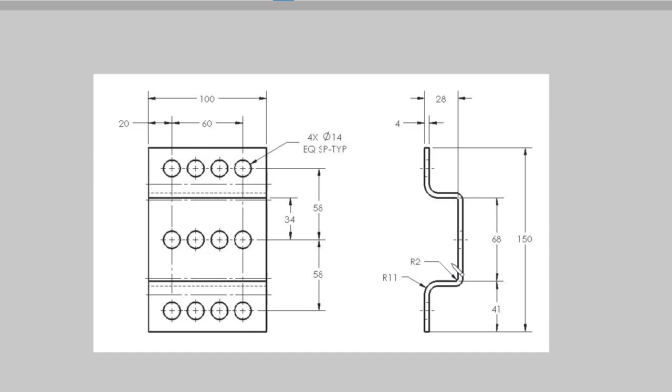But if you try to draw all the details of the profile, it's going to be too tedious. So instead, I want to use an open profile method. And also this part is symmetric, so I'll just draw half of it and mirror it. Make sure the unit is millimeters. I'm going to use the right plane to make a sketch.

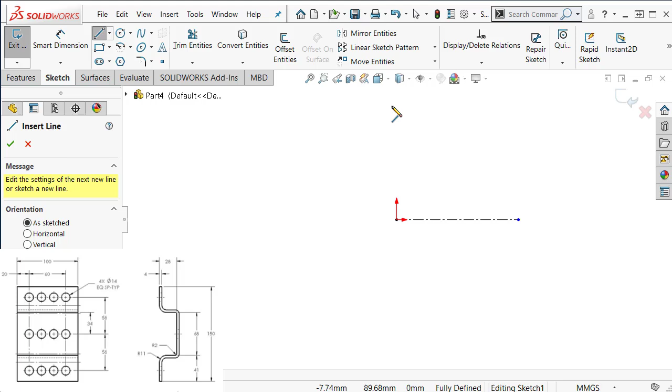I'm going to use a center line because I'm going to draw only half of it, the upper part. And I'm going to draw an open profile, like so. I don't have to make a closed profile because it's a thin part, constant thickness. So let's start adding dimensions. It is a good practice to use the largest dimensions first.

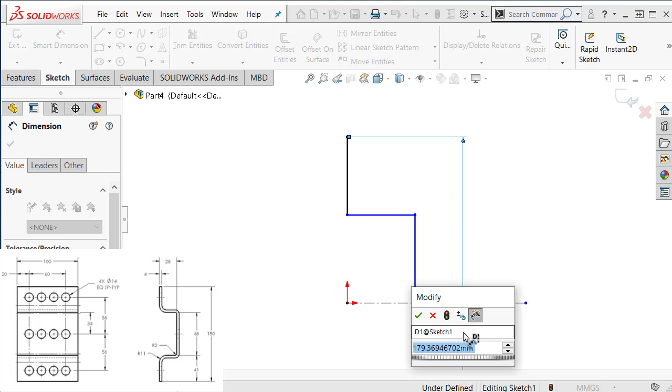So I'm going to add this overall width or height. Select the endpoint, select the center line, because one of the selections is a center line. I can move my cursor to the other side. It's going to be a symmetric dimension. And that will be 150. And to here is 68.

And this length, enter, escape, and that's going to be 28. So that already fully constrained this. And there are corners, corner fillets.

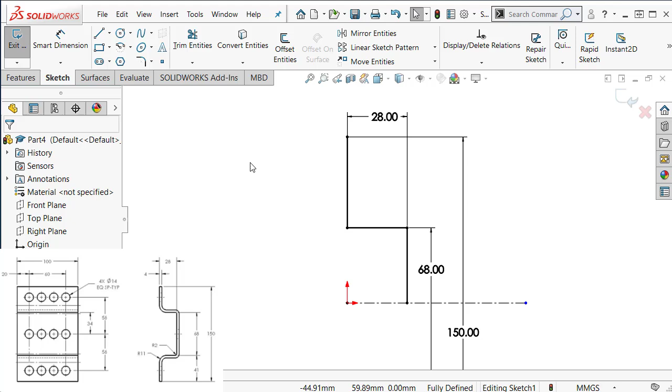Actually, thin extrusion has an option of adding a corner fillet, but the two radii are different in this case. So you can't do different radii in the extrusion at the same time. So I have to add a sketch fillet in here. This is the internal radius, which is 2, and that is an external radius, 11. And in thin extrusion, the internal radius you can specify.

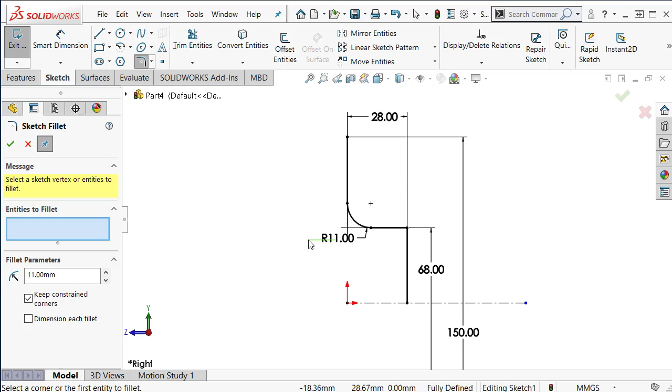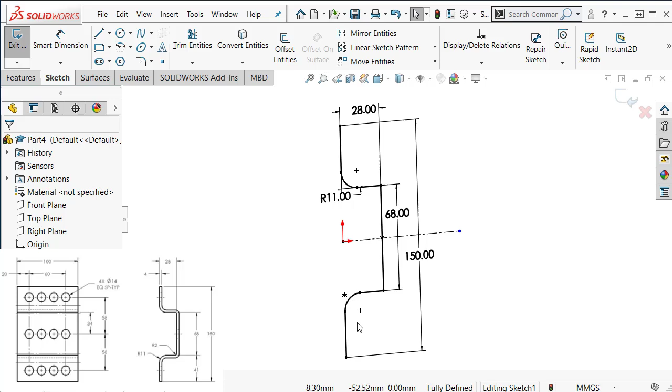So I'm going to use this corner, add a sketch fillet, and the size will be 11. Just pick the corner, radius 11. Okay, sketch is done, and I can mirror the sketch, mirror about the center line, and that creates this open profile. I'm going to create an extrude.

You want to make sure that it's going in the right direction, so you can flip the thin feature. No, not that one. Sorry, this one, thin feature, because this is an open profile. The thin feature is already selected. So here you can change which direction you want to thicken. This direction is correct. That's how I drew it. The thickness will be 4.

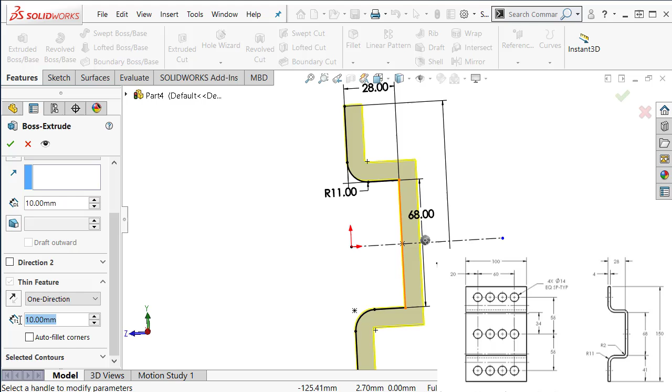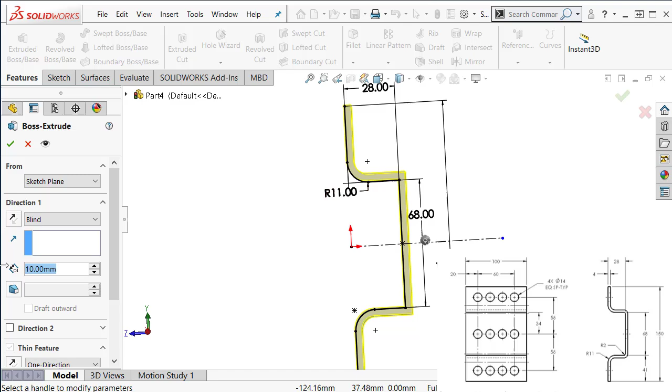I can also add auto-fillet corners. So these two are the corners, and the radius will be 2. And this radius is the internal radius. So internal radius and outer radius, but here, this radius is an internal radius. I want to extrude it by 100. Okay, so let's say okay, and I get this part. Pattern tools I'm going to show in a separate video.